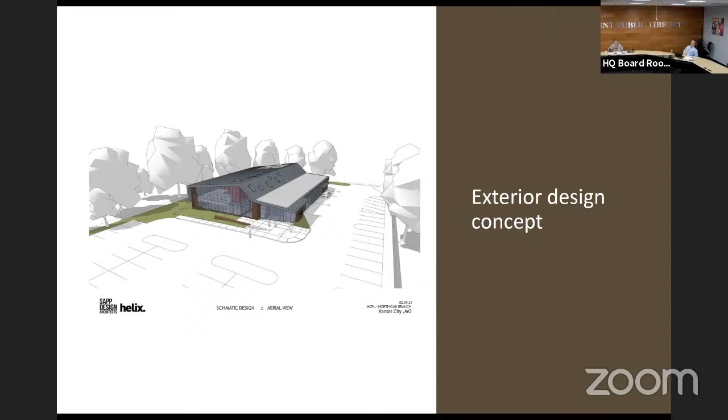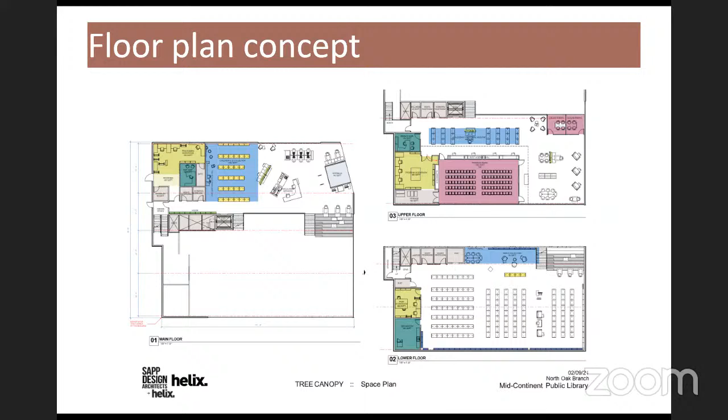It wouldn't necessarily look to keep all the lights on and all the systems up and running in a power down situation, but it would give us an opportunity where life safety would be able to. Well, you're not supposed to use the elevator in a fire, but if we did lose power, the elevator would still be operational, even if the lights were not fully operational.

If we can go back to the site plan, that's a couple slides back. Yeah, that one's good. So one of the big discussions we had, and the takeaway that I immediately got our engineers and everybody involved with, was the site. We've had problems with our existing building on this piece of property. So what I did is I asked the architects and their engineers, as well as J.E. Dunn, to go and really kick the tires and figure out what exactly caused everything we're talking about. Is that just inherent to the property? In other words, no matter what building we build and where we build it, are we still going to have the same problems, or was it something specific to the construction of the building?

I think after the report that I sent to you all last night, so you may not have had an opportunity to look at it, but it pretty much indicates that a lot of this was human error in the way that we built our existing building. There's no reason to think that what experience we've had on our existing lot will follow a new building. Most of the reasons we had problems were extensive.

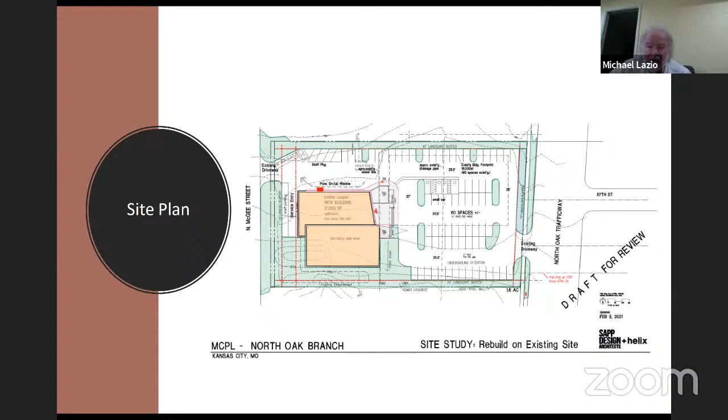To underscore, Michael, if you're anything like me, you like people to verify that you remembered what you thought you remembered - and yes, you did. We were looking to abandon the site in part because of the condition of the building. We thought it might be easier for us to get a piece of land, build a new building, move to it, and sell this site. What we discovered when it came to property acquisitions was that it wasn't easier - we had a real difficult time finding a piece of property that suited our needs within our budget. So that's why we went back to this plan, with the caveat that if staff felt we were not in a position to address all these issues, we wouldn't have brought this solution - we would have kept looking for some other property. We were equally concerned about that from the outset, but we're feeling comfortable with where we are now.

Any other comments from the committee?

Brent, just a quick question on a small matter. I was at our Antioch branch yesterday, and the first thing you notice when you walk in are these display cases for people in the neighborhoods and local communities to share collections and little things they have. Are we going to have something like this at North Oak?

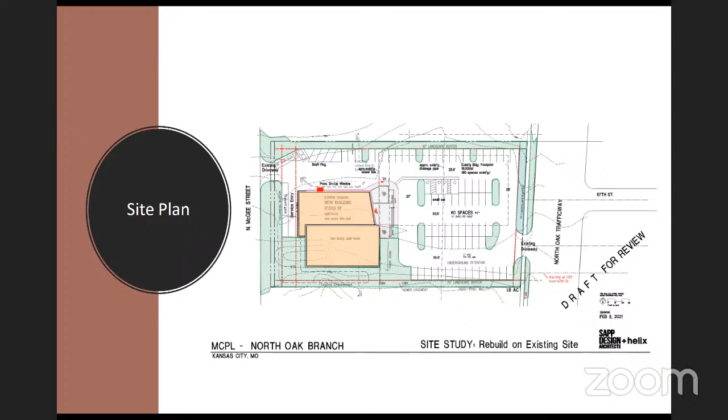This is Brent. We're not listed for a vote on this item, but understand that if we have any concerns whatsoever, this is the point to express them. I know Michael raised some reservations, because to commit more time, effort, and design if we're not going to be at this site would not be prudent.

For my part, I really appreciated the memo - it was really clear and precise. If you haven't read it, I'd encourage you to do so. Actually, I'd encourage it to be part of our minutes, because I think it addresses some questions we paused on last time we were together. So we will include that. Teresa, I think I copied you on that when I sent it out to everybody.

Thank you. So unless there's further discussion around this - really appreciate the presence of our professional staff here and the thought and care they brought, responsive to our concerns. I'm going to suggest we move on to Lee's Summit, unless there's anything else anybody wants to say. We should hear from you - sure, but if not, we'll move on.

Well, like North Oak, the purpose of the Lee's Summit presentation is to show you some of the work that the design team and our construction group have been working on for Lee's Summit, and the advice we've been giving them. So you can see that direction, and if we're heading down the wrong trail, help us redirect before we get all the way down the road.

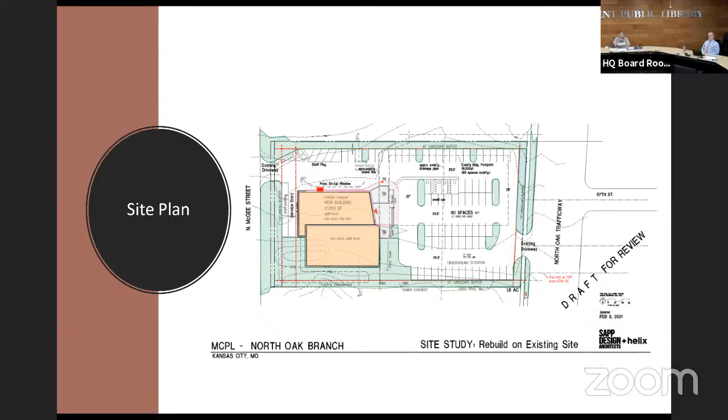So if we can go to the slide that is the Lee's Summit branch schematic design - okay, and the next slide. This is the site plan for the Lee's Summit branch. This is an updated site plan compared to what we have today. If you're looking at the site plan, the existing building is essentially the light yellow part.

The darker yellow is the new addition to the building. Everything's a lot bigger compared to where we are right now. Also, the drive lane is realigned on this site plan compared to what we have now.

There is parking on the other side of the drive lane, much of which does not currently exist. If you look at the top, you can see a green rectangle, which is a recovery of green space, where we're taking out some of the least desirable parking for the shopping center and turning it into green space.

It's on the back of our building, so it's not going to be particularly desirable for us, but the real advantage is that it creates a soft surface so our stormwater detention guidelines end up net zero. We don't have to increase our stormwater detention because we're building this additional green space on top.

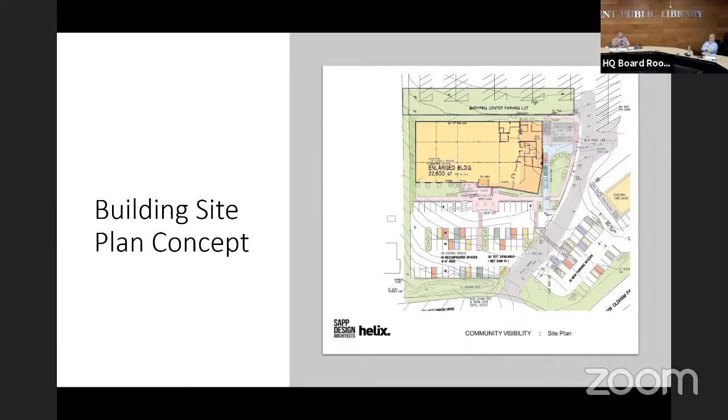If we go to the next slide, again this is similar—we had those inspirational drawings before that showed what was inspiring us for Lee's Summit and North Oak. This is the same thing, showing ideas from some other drawings and buildings that have been built recently that help inspire the concept we're doing for the addition on Lee's Summit.

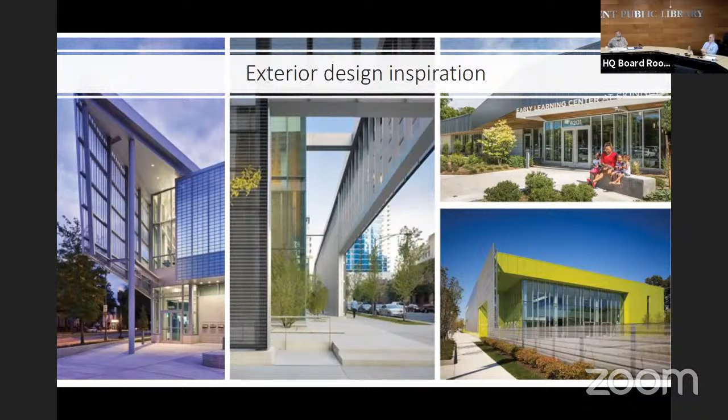The metal panels are actually placed almost directly on the building itself, as opposed to the scrim wall which we saw at Colbern Road. But this treatment is going to, in a way, reflect what happened at Colbern Road.

So people are going to link the buildings a little bit. You can clearly see it's branded well.

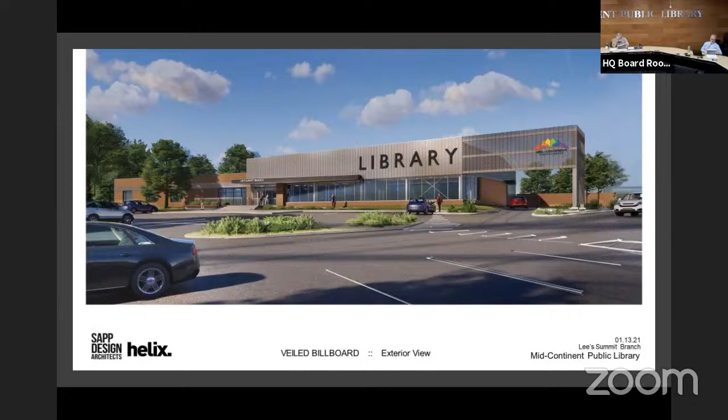One of the things you begin to ask when looking at something like this is, well, this is all well and good, but what does this do in terms of visibility? That's what our next slide is meant to show.

You can see the billboard where you drive under to the drive-up window. Simply put, if you happen to look over at the right time on 50 Highway, you can see the building as we're proposing. If you look over at the right time right now, you probably won't even see our building. So this really does help to increase visibility.

I'll mention this - we have been toying around with the idea of, in addition to all of this, adding a sign as well, a monument sign or some sort of sign. We're not sure we'll be able to afford that with the flattening of the parking lot and everything else we're talking about. But I think you can see this increases visibility considerably, even without a monument sign.

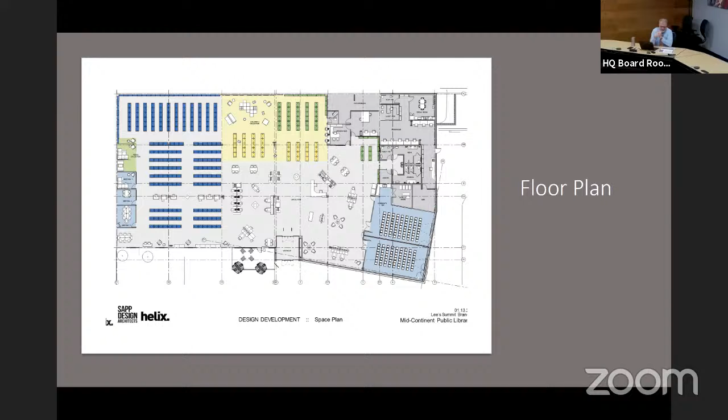But anyway, this is what the program is looking like. And then we've got a couple of interior design concepts on the next slide.

So part of what we're doing is adding a lot of natural light on one side where we can, and raising the ceiling in a key location, which will allow it to feel like there's a little more height, even though we're not actually raising the building itself. I think it's going to be pretty attractive. The scheme that Taylor, the interior designers, came up with uses those trapezoid puzzle pieces. Brad says it's 150 seats in the community room, so that's a good sized community room.

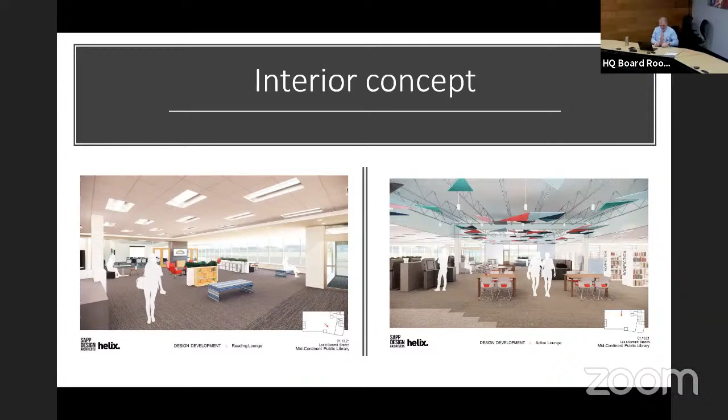Brent Schoenemeyer: Steve, I think it's back to you. Okay, so what we'll talk about is—as you know, we have been looking at really the two final projects that we have in terms of potential property acquisition, if we're going to carry on doing what it is that is in the capital plan—for Grain Valley and East Independence. We went into closed session and talked in detail about what was going on in Grain Valley. A couple of our properties are no longer options for us, but I think we still have a very positive alternative.

One of our top options is still on the table and we're still working on it to try to figure out what we should potentially offer and what site conditions are going to be so that we can build it and it will make sense. So there will be more to report probably at the next meeting—there might even be a recommendation. But at this point, there's nothing significant to report other than two of the properties have been taken off the market, and that just helps refine our decision-making process better.

Thank you, this is Brent Schoenemeyer. Thank you, Steve. Other business—I'm not aware of any, but somebody else may have something they want to raise or ask about. Now would be the time.

I have nothing additionally. Anybody from staff or the design team or Jim Coulter, the construction folks? Not hearing anything, Brent. Before we adjourn, I want to thank the design team and the construction folks for taking the time to meet with us and for great presentations and great designs. I hope that you feel the support and appreciation from the committee members. And we look forward to the guaranteed maximum prices coming to us, and hopefully they will continue to be favorable and we can take those onto the board.